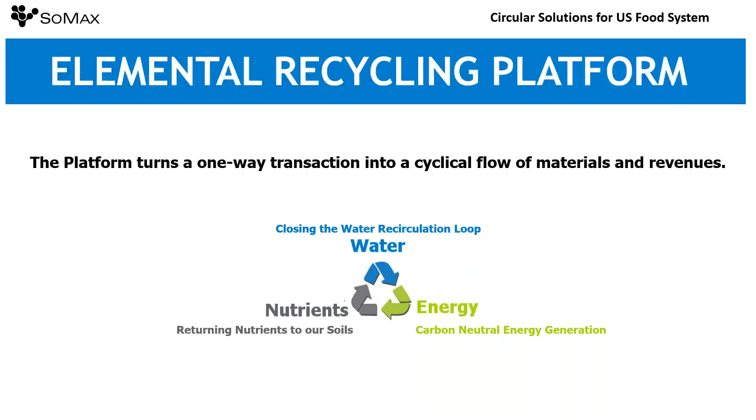Again, this is a spin-out of research and development with Villanova University. We've done 5 years of R&D, published 6 master's theses, and some of our milestones: we've just been awarded the design build contract for a wastewater treatment plant in the U.S. We're also developing a closed-loop food production system with a Fortune 50 company here in the Philadelphia area, and we are also engaging in the dairy and poultry market in Lancaster, Pennsylvania. Recently we were selected as a finalist of the Yield Lab Institute's Manure Innovation Challenge.

The team is myself, Dan Spracklin. I have 15 years of process design and improvement in corporate America, and 8 years of being an entrepreneur and CEO of a waste hauling business. We have expertise in logistics and hauling waste materials.

Jeremy Taylor is our Chief Sustainability Officer. He is actually a graduate of the program at Villanova. He did his master's on the HTC process and is an expert on HTC and also a process engineer. Prior to getting his master's degree, Jeremy worked for a couple of years for ConocoPhillips in their labs.

And then we're backed up on the technical side, led by Dr. Ross Lee, who has a PhD in organic chemistry. He also spent 36 years at DuPont Chemicals, developing and leading R&D on materials and design. In addition, we have Dr. Satrio, who has a PhD in chemical engineering and is a world-class expert on biomass conversion.

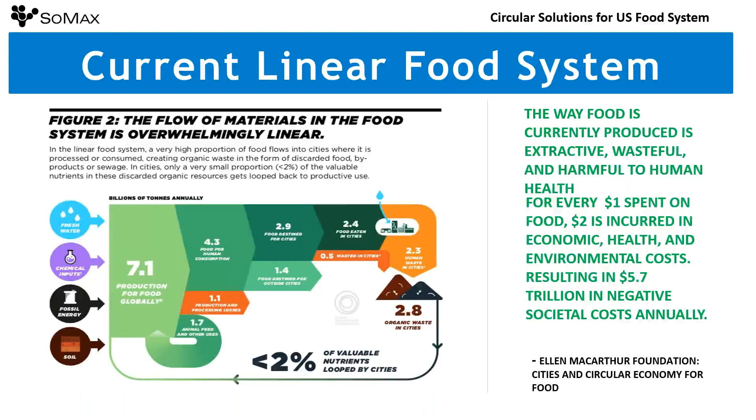The other problem that we're facing is a looming landfill crisis. This is particularly acute here in the Northeast, where as of 2021, we'll have 8 years of remaining capacity in landfills.

We also have the largest population density in the U.S. Between the I-95 corridor of Boston to Washington, D.C. is approximately a third of the population. So it's very concentrated, and we're going to run out of landfill space within a decade.

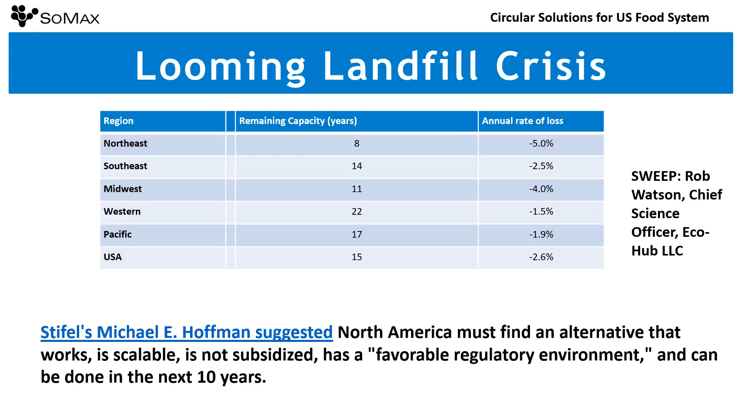So the only way that we can handle currently organic waste are really 4 ways. We can landfill it, land apply it, compost it, digest it anaerobically, and then I'm here to introduce you to a new technology today called hydrothermal carbonization.

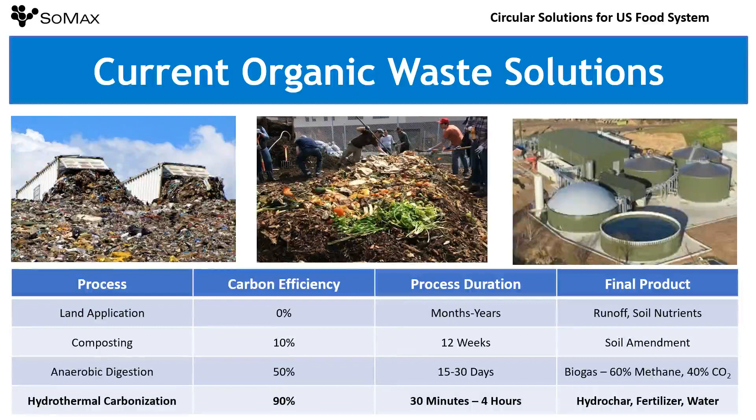So there's big advantages here. Also, we're about 80% of the CapEx costs of an anaerobic digestion plant, and we're about a quarter of the footprint.

So to recap, basically we have all of this waste, we're running out of places to put it, and we've got to do something about it. So with that, I'd like to introduce you to the Elemental Recycling Platform, which is a suite of technologies that allows us to convert those organic wastes into their elemental components.

At the heart of our process is hydrothermal carbonization. That allows us to take any waste, to carbonize it, and then we're able to, at that point, separate it from its liquid environment into solid and liquid process streams.

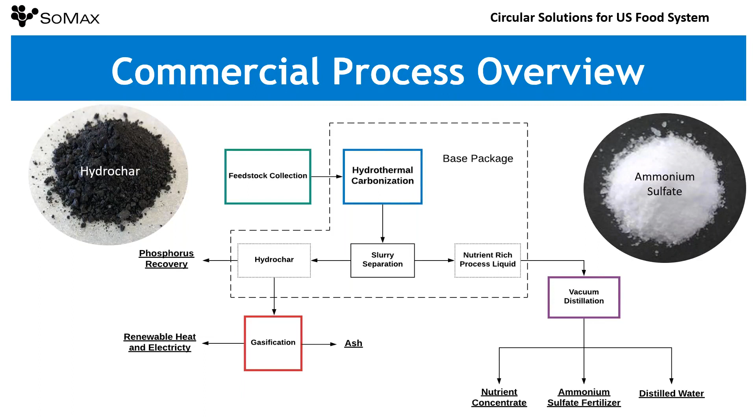And then again, depending on the feedstock material, it's anywhere from 30 minutes. So for things like sewage sludge, hog manure, you're around 30 to 45 minutes. Things that are more lignin-based, so hardwoods or forestry residues, is around 4 hours.

So they're modular as well and scalable. So if you had, let's say, 150,000 tons, you just put 10 of these reactors in. We like this because it allows us to build up and build down. Easiest way to think about it is like in the IT world where if you need additional storage, you just add another server - you don't rebuild an entire bigger server.

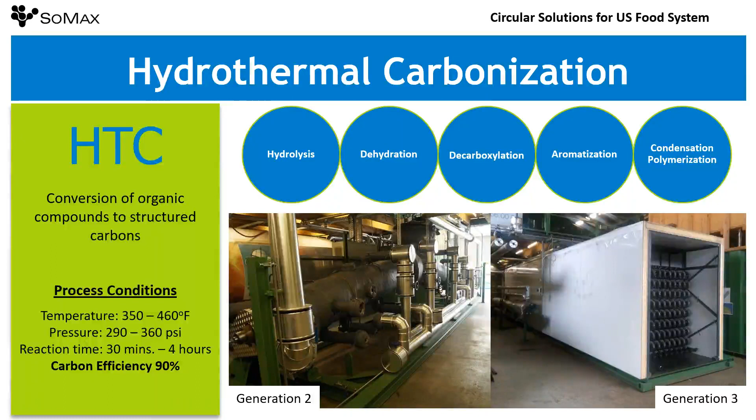So what is hydrochar? Hydrochar is a solid fuel. Easiest way to think about it is to think about coal. If the term wasn't ruined by politicians, we would call this clean coal. This hydrothermal carbonization process actually mimics the natural coal occurrence, but instead of hundreds of millions of years for coal formation, we do it in a number of hours. But we get very good energy densities.

We do have emissions, but our emissions are biogenic in nature - they're naturally occurring. The easiest way to think about it is a forest. In the spring, when the leaves are growing, it's soaking up a tremendous amount of carbon dioxide. When those leaves fall to the ground in autumn and they disintegrate into the soil, they're releasing all that carbon dioxide back into the atmosphere.

So we're playing with today's carbon rather than fossil fuels that has that carbon stored for millions of years. We're in today's carbon cycle and we're just recycling that carbon. Think of it as respiration, breathing in and out. We're able to do that, but also produce the energy and the power associated with it.

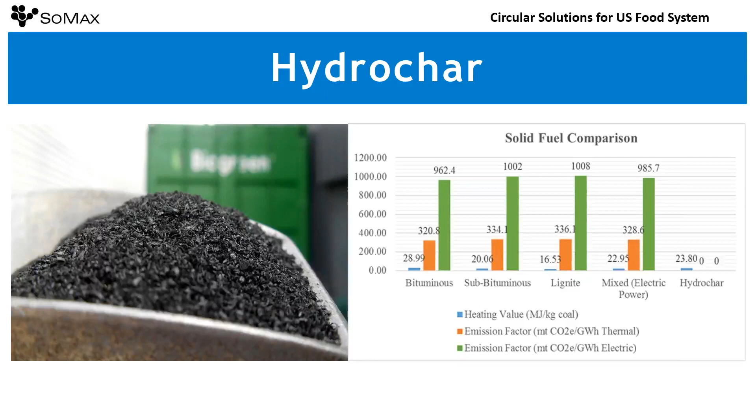So for us, energy is really the low-hanging fruit. It's our minimum viable product. We're ready - this hydrochar can be easily burned at any existing coal-fired power plant in the U.S. It can also be used to set up and gasified on-site to create distributed, localized power and heat generation.

Beyond that, we're actually working on a lot of different applications for the hydrochar product. We just received a grant from the state of Pennsylvania to study the hydrochars from food waste and from sewage sludge to be upgraded into activated carbon for advanced water filtration.

There's also certain materials that have benefits. So, for example, marijuana or hemp - the bast or the leftover of processing those materials and the dust - we can take and hydrothermal carbonize those, and we actually will produce a single atom layer thick sheet called the carbon nanosheet. That carbon nanosheet you can stack together in a solution and create a supercapacitor. So now you've created energy storage devices.

This hydrochar can also be used as a soil amendment, although there's some studies saying diametrically opposite things. Some are saying it's very good for the soil, some are saying it's not so good for the soil.

Beyond that, you can actually put this into concrete. It actually makes the concrete 4 times stronger and 30% more waterproof, because the hydrochar itself has a hydrophobic shell on it, meaning that it repels water. That's key because in the process conditions and operations, we take this wet material, we process it, and now we've increased the dewaterability, and the cost for dewatering we've lowered by roughly 50%.

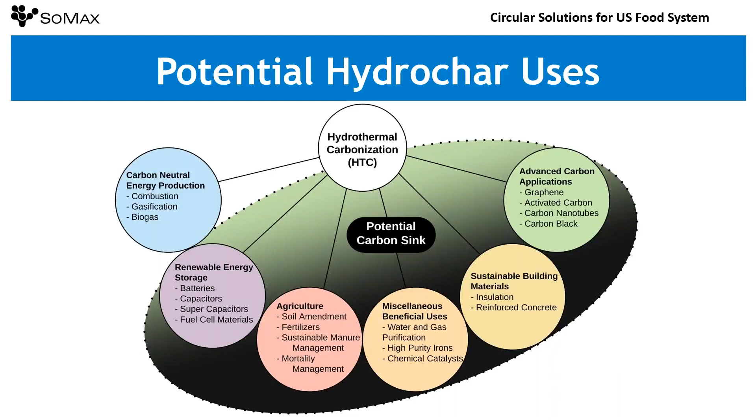So with that, I'll go into a couple of our technology partners. We've partnered with a German company called Silcon. They have this piece of equipment that is actually for manure collection. We can take this on site to a farm and go suck out a manure pit, whether it be hog manure or cow manure, bring out the solids. This uses cavitation to create a solid that's now balable. We put that into a baler, we make bales, and then those bales can be shipped to a centralized location for processing off-site. So that's a situation where you can have lots of area farms combining into one centralized production facility to gain economies of scale.

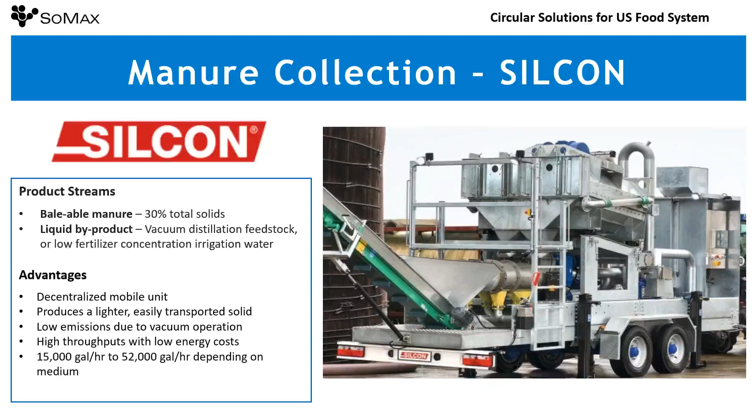Our gasification unit is by a company, AHT, out of the Netherlands. This has been used over 40 years. It's one of the most efficient gasifiers. A lot of questions we get is why do we gasify this or recommend it? And that's because of the energy efficiencies. Here you'll see it's 88% efficient between thermal and electricity transfer, as well as its lower emissions. So this gasification process actually cleans up a lot of pollutants. The way that it's combusted lowers the SOx and NOx emissions. So beyond just carbon dioxide and CO2 emissions, we're actually lowering other emissions that are actually more harmful to the environment.

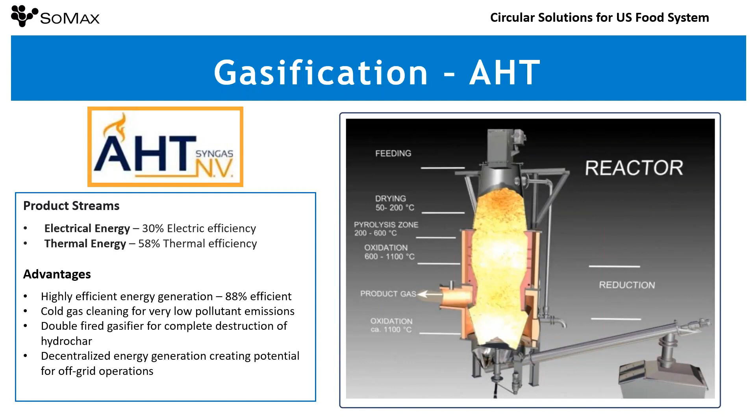And then we have vacuum distillation, and this is where we're able to take our processed water, we put it through an evaporator. That evaporator now concentrates down all the minerals and then creates essentially a distilled water. From that evaporation, we can add sulfuric acid into there to generate ammonium sulfate. Ammonium sulfate, again, is a bio-based nitrogen fertilizer that can be used in replacement of fossil fuel-derived nitrogen fertilizers. And then the concentrate can actually be used for nutrients for your soil. So this is where your micronutrients are, your calcium and things like that. This has a very low temperature, and then we actually can run this through the waste heat of the gasifier, that there's no outside energy component.

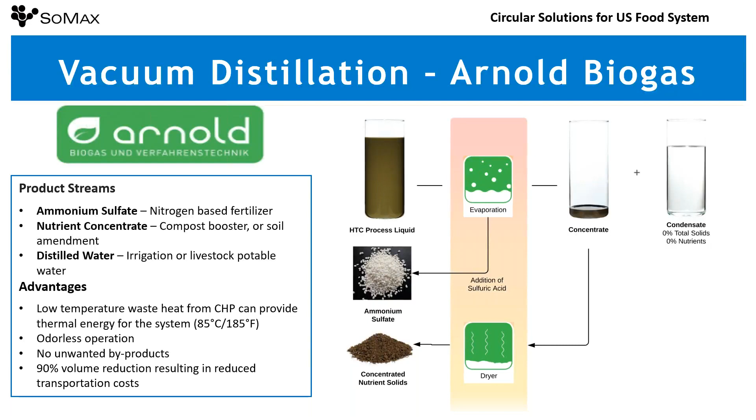Our goal in this is to build standalone operations that need no outside energy input. So these are things that are independent from the grid, and that allows us to put them virtually anywhere.

So I want to go real quickly over 3 projects that we have in development. These are going to follow a suburban, urban, and a rural model, and gives you the idea of flavor of what can be done, since we have a platform that's very flexible to meet different demands and can actually have a lot of innovative data solutions.

So this is actually, we've been awarded the design build contract at Phoenixville. This will be the first installation of hydrothermal carbonization technology in the United States at industrial scale. There are a half dozen companies worldwide that have hydrothermal carbonization plants. They're primarily in Europe and Asia because of the limited land constraints and more of the environmental factors that they faced. But this, to our knowledge, is the first one in the U.S.

So a little bit about this project. You'll see in the picture, here's the layout of the treatment plant. This is a 3 million gallon per day treatment plant that is actually land applying their biosolids as Class B fertilizer. They do pay a company to actually take this and apply this at farmland or agricultural land in Pennsylvania, Maryland, and in Virginia.

There is some legislation pending both in Maryland and in Virginia to outlaw the application of biosolids, and there's also a lot of pressure here in Pennsylvania to outlaw land application of biosolids. One of the primary drivers of this is PFAS. PFAS is a forever chemical. It's in a lot of flame retardants. It's been shown to accumulate in the human body, and it's a toxic material. There has been a dairy in Maine that has just shut down because they were land applying biosolids on their land. Those biosolids, the PFAS got into the feed, got into the cows, the PFAS got into the milk.

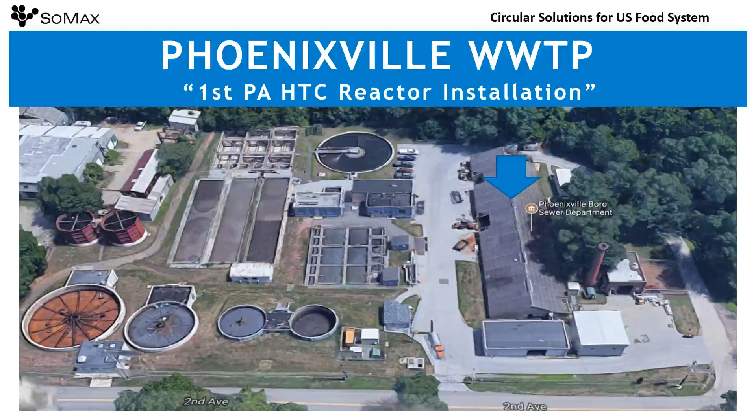So this is just a quick overview of the process at the borough. We're processing 51,000 gallons a day, and we're recycling that processed water back to the treatment plant. Our recycling rate is 3.3 million gallons a year, representing less than 1% of the water being treated at the treatment plant. That water just goes back to the headworks and gets treated normally.

We're not doing vacuum distillation here. This process will end up with 1,700 tons of hydrochar every year, and again, that's where we get our energy.

The second phase of this project is to put in a second reactor to actually take food waste from the local restaurants, breweries, and grocery stores from this community and process them. At that point, we'll be able to power an additional 500 homes within the community.

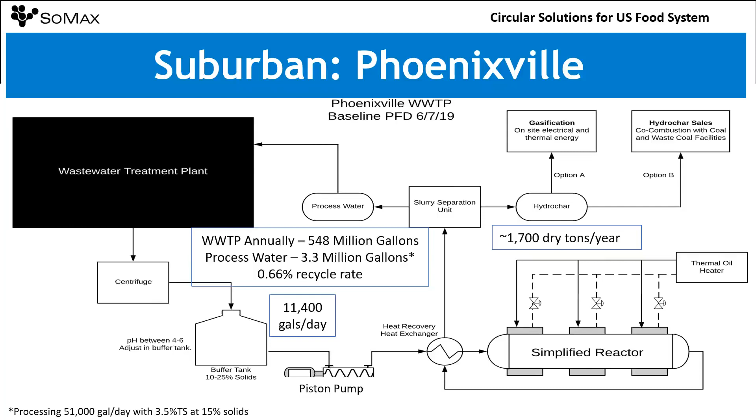And you're dealing with something that the municipalities can't ever say they're going to stop treating waste. It's something that's going to be here as long as there is a municipality.

So now we want to move into the urban solution that we have. We've been working with a Fortune 50 company here, and we have interest from a lot of other companies, and we're starting to engage the city of Philadelphia.

The big driver behind this is twofold. One is that the city of Philadelphia and a lot of the corporations headquartered here have 100% zero waste goals, meaning they don't want to send anything to landfill anymore. Those have horizons far in the future, about 20 years, but this is a way we can do that.

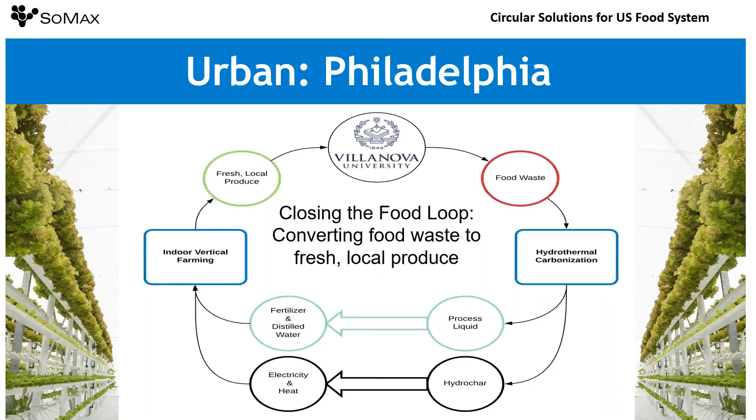So this next one gives you a mass and energy balance, shows you a 10,000 ton input at 25% total suspended solids. This is what we'll end up with is all the numbers you'll see here. But the key thing is that we'll have a net energy production of around 2,200 megawatt hours of electricity. That's enough to produce 500,000 heads of lettuce per year, which can be sold back to those industries that are sending us their food waste.

We're also working with Villanova on this. So again, it's closed loop. You give us your food waste, we process it, we sell you back fresh produce from the energy that was derived from that food waste.

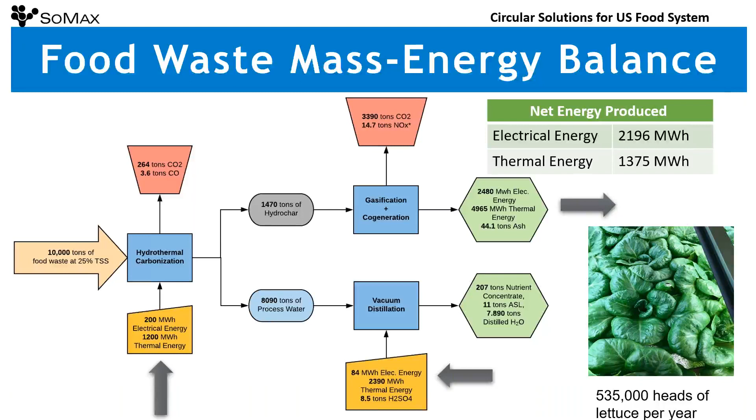So a little bit about the carbon reduction here. We did 3 LCAs, life cycle assessments, on this process, and our results show a 7.5 million kilogram reduction in CO2 emissions. That's the equivalent of taking 1,600 cars off the road, and it's a 140% decrease in CO2 footprint from the status quo of sending that food waste to a landfill.

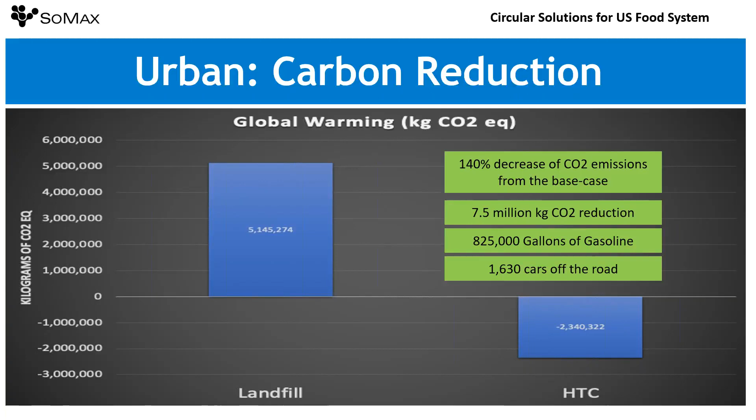In addition to that, we looked at energy sources. This is a chart looking at the base case, which is the conventional farming process, and a closed loop system. At the top, we've had to bring conventional farming up to 100% just so you can see our impacts. The bottom portion is the actuals, but if you look at global warming or ozone depletion or smog, there's no impact. We've had to raise it up to 100 to see those minimal impacts that we have.

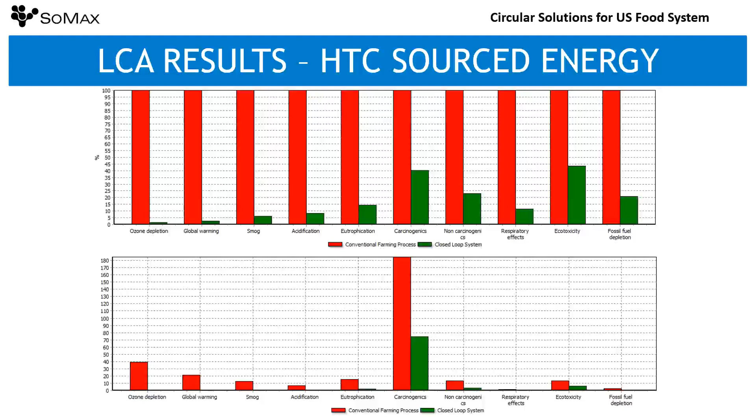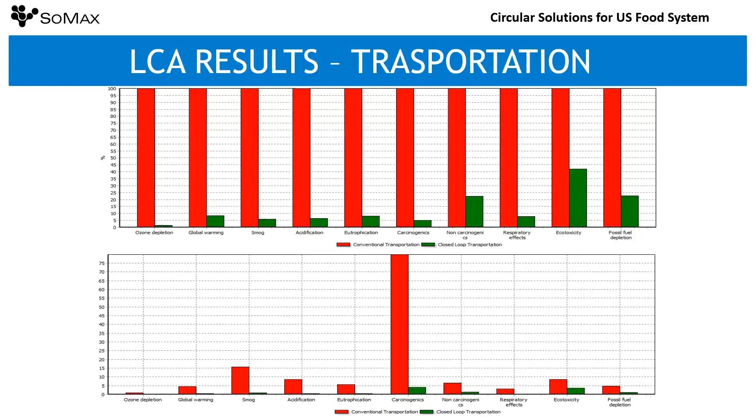Beyond that, I want to get into the last one, and the last one is our newest one. This is very new, we've only started discussions with these companies in the last couple of weeks. Kreider Farms is located in Lancaster, Pennsylvania. They have a combination of a dairy farm and chicken farm, with 4,000 dairy cows producing 10 million gallons of milk annually, and 4 million chicken layers producing 1.2 billion eggs.

What they're actually looking at doing on the opposing property is building a feed mill, and we're talking to them about putting our unit on there. The nice thing will be that we'll be able to take the waste from these animals and process them into heat, electricity, and clean water and nutrients. Those nutrients will go back onto the farm fields, the water will go back to consumption for the cows, and the heat and electricity is used to run portions of the dairy farm electrically. The heat is also being used to dry the chicken feed, all done through a tunnel between the two adjacent properties.

This allows us to eliminate roughly 500,000 vehicle miles. We'll also be able to reduce nutrient loads to the environment.

So a little bit about Lancaster, Pennsylvania: they have a nutrient abundance, too much phosphorus in the soil and too much nitrogen. So what we're able to do is actually take the phosphorus from a place like Lancaster and sell it into another market that needs phosphorus, that doesn't have the issues Lancaster has. The eastern shores of Maryland, anywhere there was a big concentration of poultry production, you're going to have phosphorus issues from the land application of chicken litter and its high volume of phosphorus on those soils.

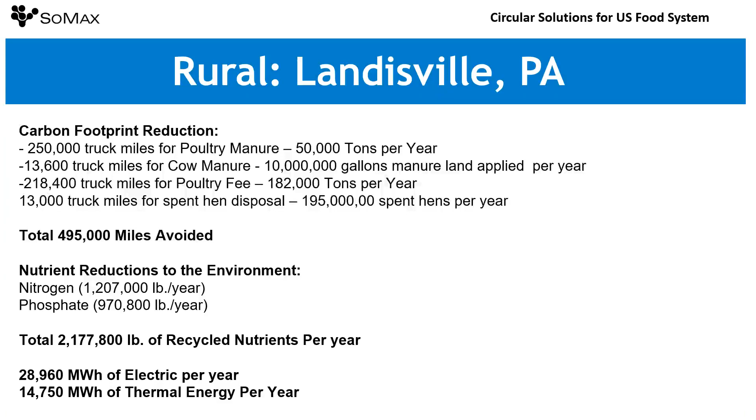So what this does, and why Kreider Farms is very interested, is we've had some discussions with a local grocery chain here called Wegmans. What they're doing is looking for a new brand segment. You saw, maybe a decade or so ago, the leap to organic, and the price difference between free range organic eggs and your traditional eggs is dramatic. So they're looking for a midpoint between those. What they focused on, and you'll see this from a lot of retailers, from the Walmarts and the Krogers and all the grocery stores, is trying to lower their carbon footprint.

By reducing these amounts of carbon and fossil fuel use, we're able to satisfy those requirements and sell this product at a higher premium. Wegmans is talking about 60 cents a dozen eggs higher than the traditional egg. That delta in price allows the farm to pay for all of its infrastructure, and over a 20-year period will make a tremendous amount of savings and more income based on doing what they're doing today.

Our value proposition is really about driving your growth, enhancing your brand, increasing profits, and reducing risks. We're future-proofing anti-land application legislation and greenhouse gas emissions reductions. Unlike some other players in this organic waste space, like anaerobic digestion and biogas, we don't rely on subsidies. There are no federal subsidies for this, and we're not going after those. These stand alone on their own and make a profit.